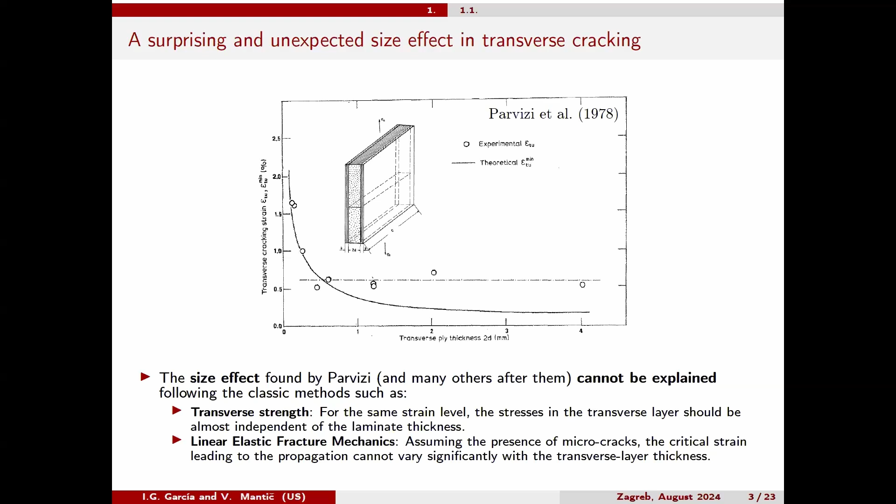But in addition, you can't explain that with linear elastic fracture mechanics, assuming that we have some micro crack inside the internal layer. So even nowadays, the typical criteria that we use to predict failure in composites are not able to predict this size effect that they found. So when we have some experiment that, let's say, contradicts the typical theory that we use to predict failure, typically in science many people propose other theories in order to explain and predict this phenomenon. And in particular, there are a lot. You can imagine, the experiments are quite old, and over these decades a lot of criteria have been proposed to explain this size effect.

And also, this is very important for the fracture community because some of these criteria have been extrapolated to other materials and other totally different problems. Here in this scheme, we are just highlighting the four main criteria that are used in the composite community, and in particular the Dvorak criterion or theory that is the most popular. It received other names like the in situ strength, etc.

But all of them, the ones that I highlighted here, can be categorized in two types of models. Ones that are based on a stress model and others that are based on an energetic model. And we have also another, the coupled criterion, that combines the two. That is very important for the next thing that we are going to do.

So these theories are trying to explain and predict more or less well this phenomenon, this size effect that cannot be predicted by the classical theories to predict failure in composites. But they don't take into account the residual thermal stresses that we can find in this kind of laminates.

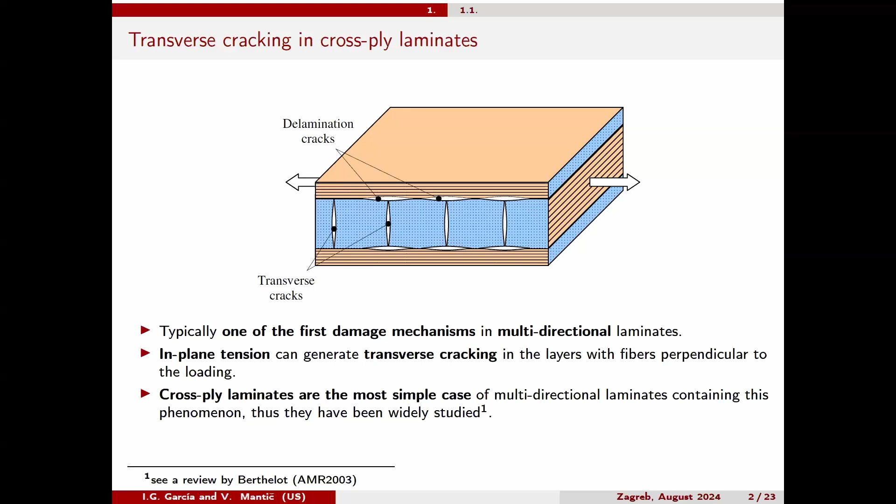If you go back to these slides, you can imagine that if we fabricated that in an autoclave at high temperature, and we have a different coefficient of thermal expansion in the different directions of the lamina, when we decrease the temperature from the curing temperature to the service temperature or the test temperature, the compatibility between the different layers is going to be prescribed, and in this case, the stretch and the contraction between the different layers are going to be different, and that's going to generate some kind of residual thermal stresses inside the layers.

But if we do some calculation with the laminate theory, we can get that for modern composites, for example those used now in the aeronautic industry, these residual thermal stresses in some cases can reach 50% of the transverse strength of the lamina. So it's very important, but they are not taken into account in all the previous models. Only in the incremental energy criterion is it taken into account, in the proposal by Hashin, not the Hashin criterion, another proposal, but they are very important.

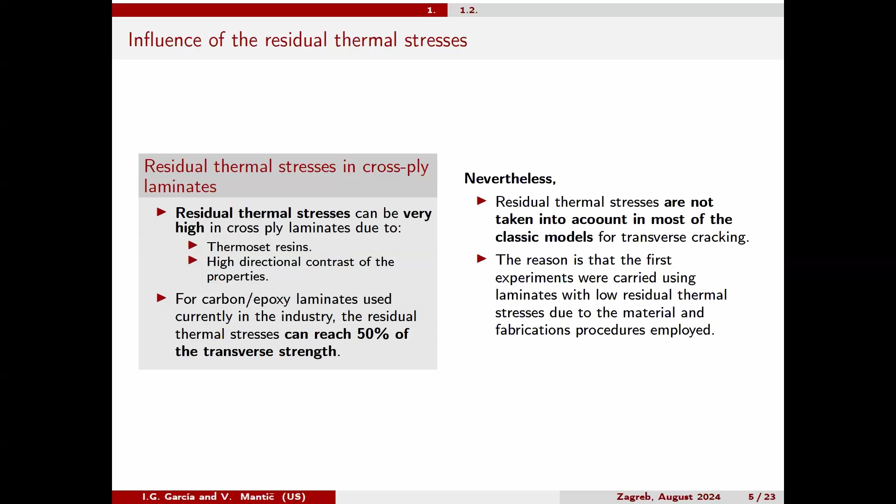So the objective of this work is to introduce the effect of these residual thermal stresses on the analysis of this problem, on these different theories. Why, up to now, are they not in these theories? The reason, I guess, is that the first experiments, for example by Parvizi and other co-workers, were done in glass epoxy, where the contrast between the directional properties of the coefficient of thermal expansion is much lower than in carbon epoxy. And in addition, the fabrication procedure wasn't the typical autoclave curing and so on. So they don't actually expect great residual thermal stresses.

So this is the outline of how we are going to try to do that. We have finished the motivation, and now we are going to see how to modify these models, trying to explain the size effect. And after, we are going to go for an experimental validation, actually a preliminary experimental campaign that we did recently. So we are going to focus now on the different theories that explain the size effect, and in particular, we're going to start with the models that are based in some manner on a stress analysis.

So now the laminate is vertical. We have the external layers with the fibers oriented vertically here, and the internal layer with the fibers oriented through the screen. And we can obtain the stresses, assuming linearity, by two partial problems: one that is more or less mechanical, just applying the mechanical strain monotonically, and another one that is more or less a thermal problem where we apply just the increment, actually a decrement, of temperature.

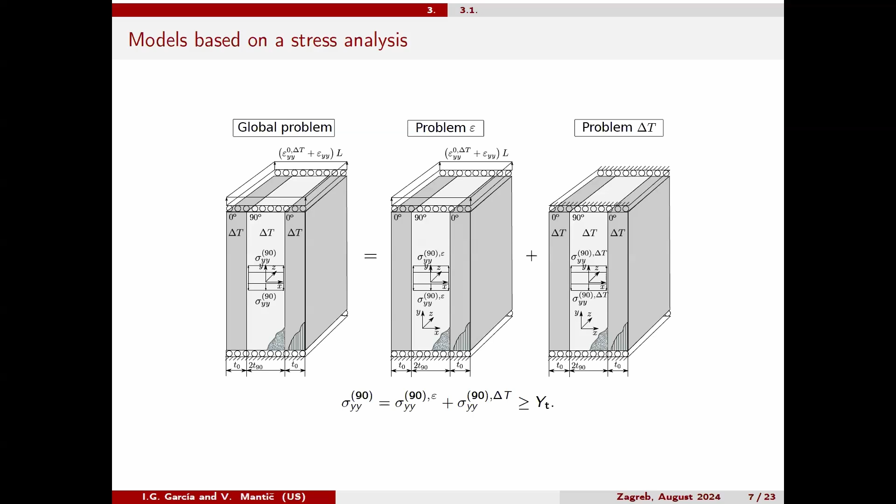And with the addition, again assuming linearity, we can compare that with the transverse strength of the lamina. So we can use the laminate theory for that and some dimensional analysis. I think you all know this kind of analysis. And with that, we can obtain an analytical expression for the stresses of the partial mechanical problem and for the partial thermal problem. That is written entirely in our papers.

So with that analysis, what we obtain is that the effect of the residual thermal stresses is just to add a term that can be calculated analytically to the mechanical strain that we are measuring in our machine or we are applying in our structure. This is for the theories based on stress analysis.

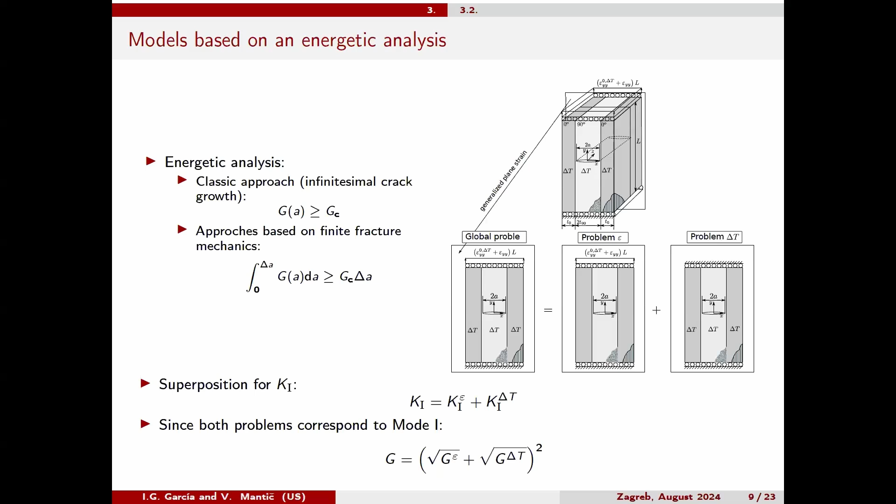Well, we need G, actually, the energy release rate for each partial problem. And we did that with boundary elements. We can do that with finite elements also. But if we do it with boundary elements, that is what we did, and normalize the result for G with the stresses that we obtain for the corresponding problem in the stress analysis that we did before,

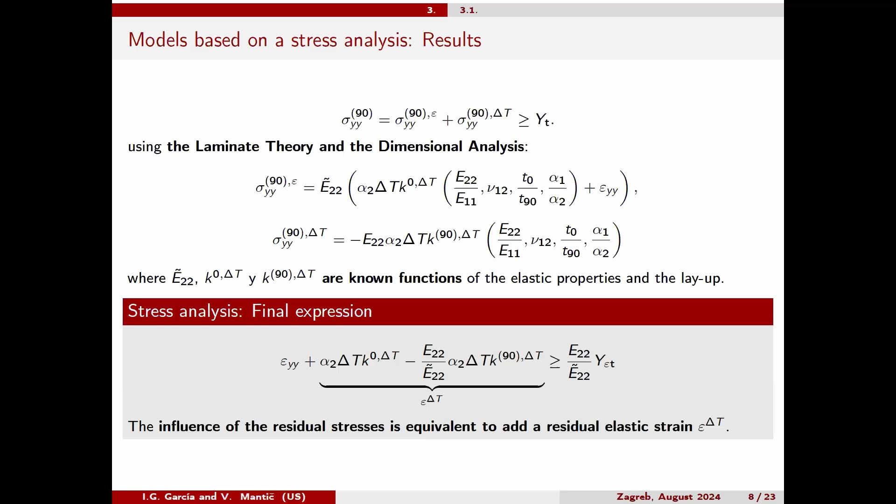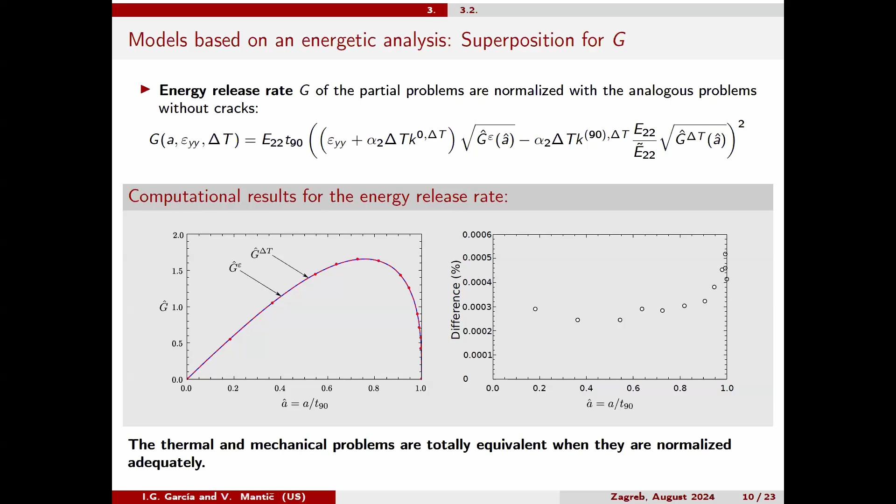I mean, with these stresses here, what we obtain is that actually G is the same for the thermal and the mechanical problem. And this is very interesting, because it avoids us having to calculate a thermal problem. Actually, we obtained that numerically, but it was proved by Professor Mantic some months ago.

Well, with that, we can calculate the value of G with the same strategy as before. So G is given by some parameters, but with respect to the load, it's given by the addition of the mechanical strain that we are applying, and this term that again is the same as before, the equivalent strain, let's say, that comes from the residual thermal stresses. With that, we can apply directly any kind of energetic approach based on G in some manner. That is the case of the previous theories.

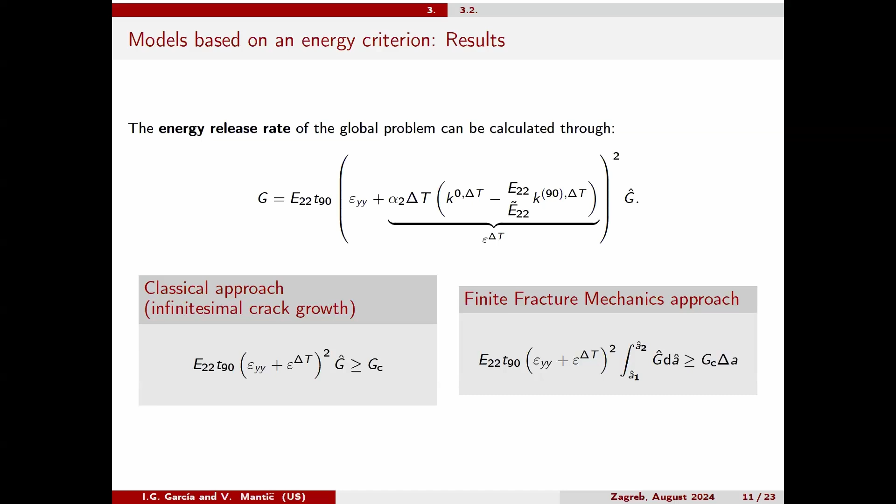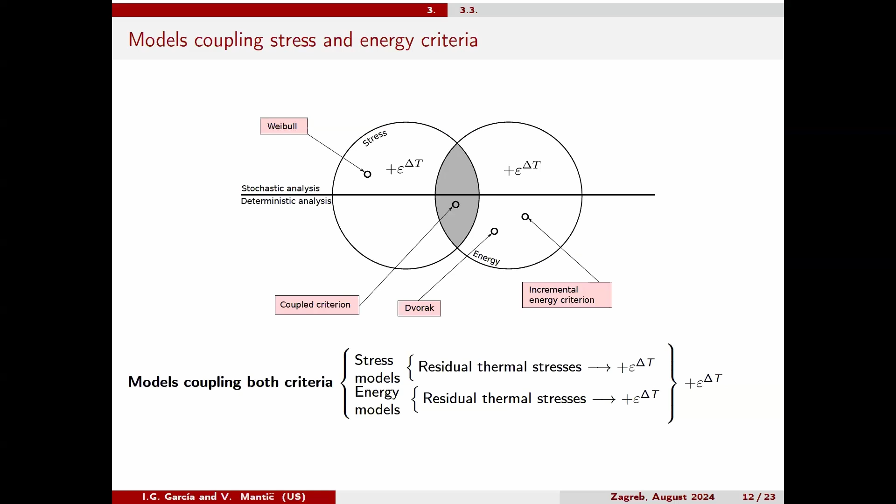So what happens with the models that combine the stress and energy models? For example, the coupled criterion. Since the effect of the residual thermal stresses is the same for the stress models and the energetic models, for the combination it is going to be the same, just to add this term here. So this term is very important, as you saw. So we are summarizing in this slide this term and the dependence of this term on the parameters.

So you can see that it's linear with the increment of temperature, which in our case will be negative because it will be the difference between the curing temperature and the service temperature. And we have also some functions that are analytical and depend on the material and laminate properties that you can see here.

So we designed an experimental campaign for evaluating if this strategy is accurate or not for the prediction. We did some plain specimens that are classical for this kind of composite. With the next strategies, we fix the ratio of the outer to the inner ply thickness in order to fix this parameter here, and we fix, of course, the material. So all the parameters here are fixed.

So what we expect is that the residual elastic strain, this term adding to the mechanical strain, taking into account the residual thermal stresses, is linear with the temperature. And this is what we want to evaluate experimentally.

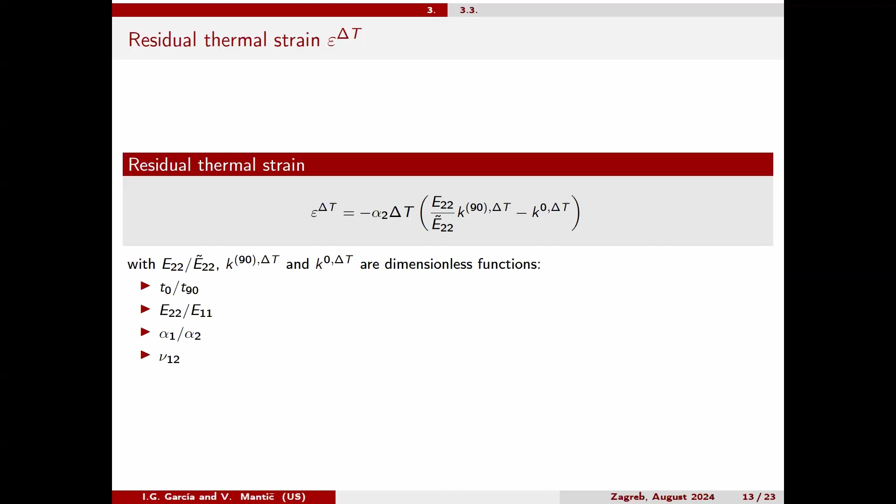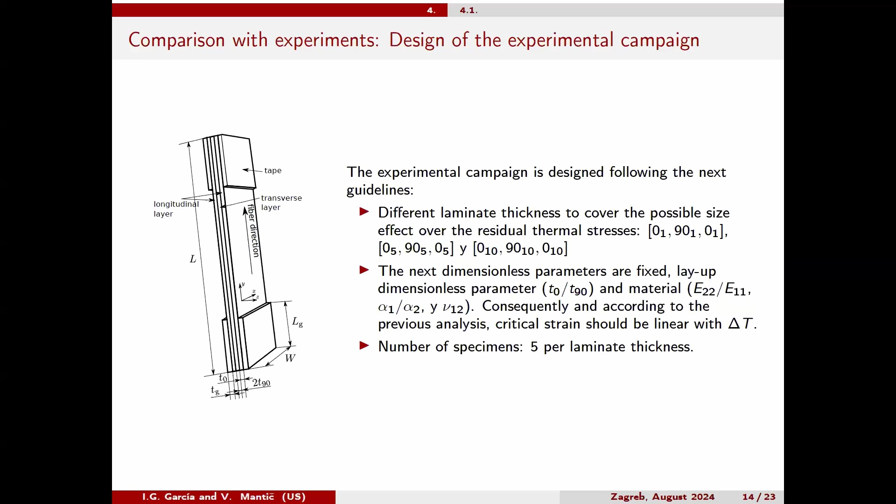So we fabricated 5 specimens per laminate thickness, and the others are the classical ideas. Concerning the experimental setup, we use a monotonic tensile testing machine, the classical mechanical one, with a strain rate that is very classical also in composites. But the interesting thing, the new thing, let's say, is that we are using a climate chamber in order to modify the residual thermal stresses.

As the residual thermal stresses come from the decrease of temperature from the curing temperature to the test temperature, we can't modify the curing temperature because it's given by the manufacturer and is also a chemical optimization. If we modify the temperature at which the test is done, we will actually be modifying this decrease of temperature. So we expect to modify the residual thermal stresses.

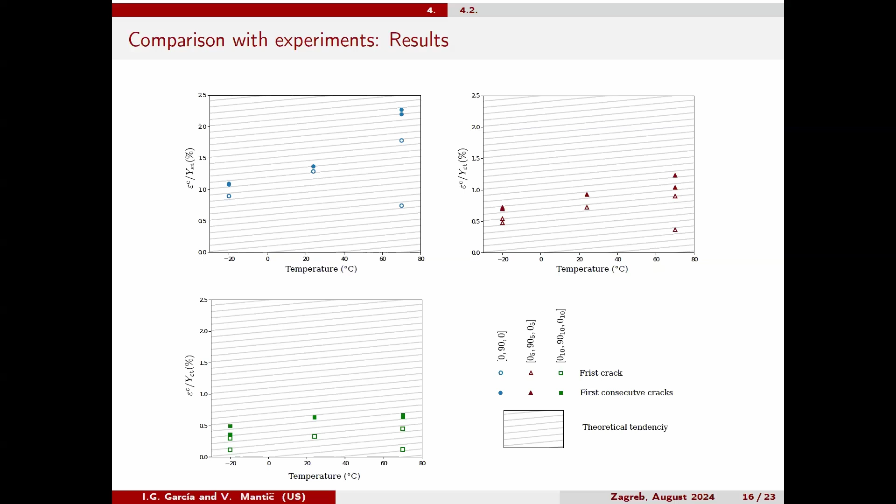So as you can observe, the results are not very good. For the thinnest laminate, sometimes you have other kinds of failure like free edge delamination, etc. The tendency qualitatively is okay, but quantitatively we have a high level of scatter, as you can see. For the medium thickness we have better results, and for the thickest laminates we have results that are, let's say, more or less correct. But anyway, they are definitely preliminary experiments.

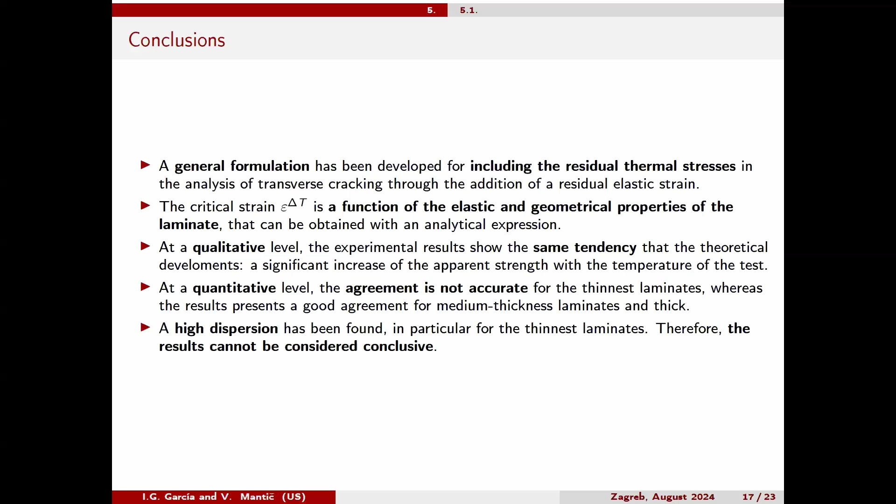So to conclude, we have developed a general formulation to introduce the effect of the residual thermal stresses, and this formulation is very easy to apply to the most popular models in composites. It's just adding a term to the strain that we have mechanically. We have compared that with a preliminary experimental campaign. At a qualitative level, the increasing tendency is predicted well, but at a quantitative level the predictions are not good, and we need more experiments to verify whether this is correct, or if we need to take into account other kinds of phenomena in our strategy.

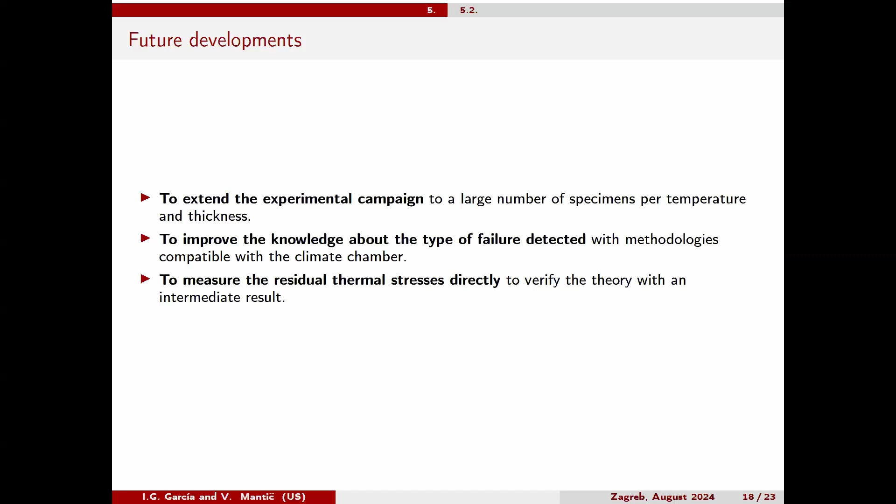So to finish, we are planning a new experimental campaign with more specimens and more laminate thicknesses. We need to improve the knowledge about the failure events that we are detecting with acoustic emission; we are already collaborating with some colleagues on this topic. And finally, we need to measure the residual thermal stresses directly, because now we are measuring the consequence of these residual thermal stresses, the critical strain at which the crack appears. We could measure them directly in our laminates before testing, in order to have an intermediate result to compare with our theory.